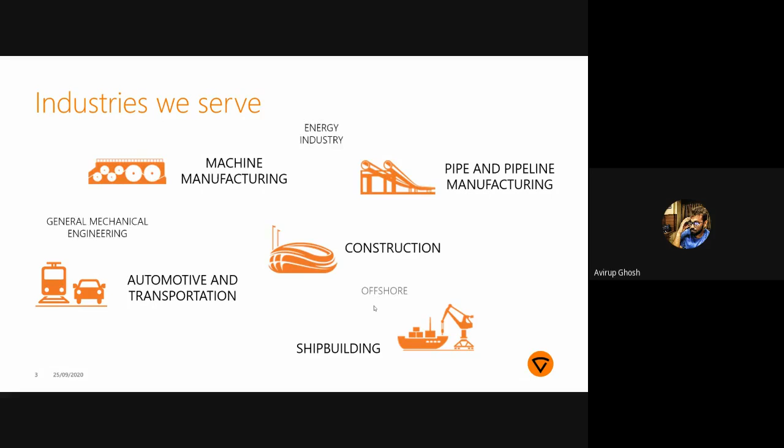Just a preview of where welding is found. You will find a huge lot of engineering segments where welding is being used. These are some of the five major industries, and apart from that, you have some sub-industries below this.

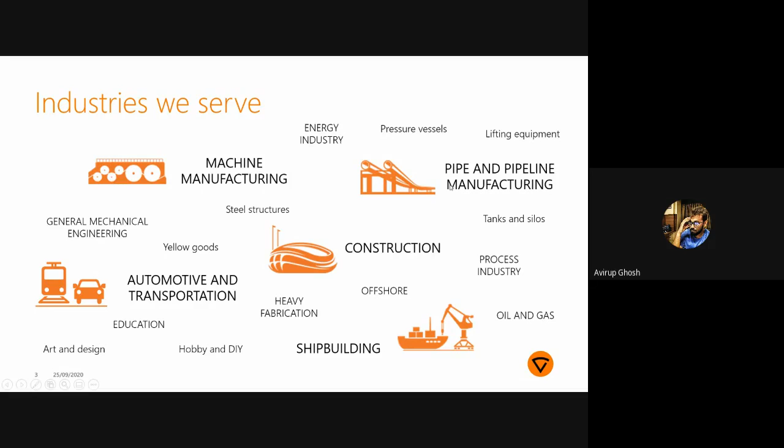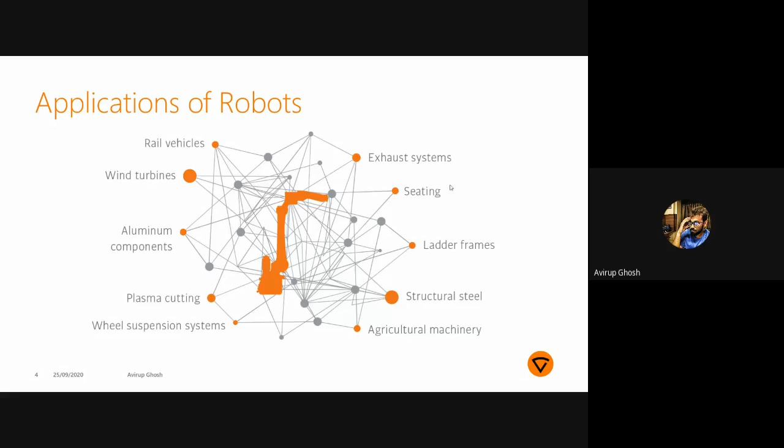But when we go to robotics, we'll see half of this is not that much covered. If I go to a Venn diagram of how robotics is covered in these fields, you will see around 70% of these industries are covered with robotics, because when we go for a robotic process automation or automated welding process, we need a lot of path planning to be done, which is not 100% achievable in all the welding industries.

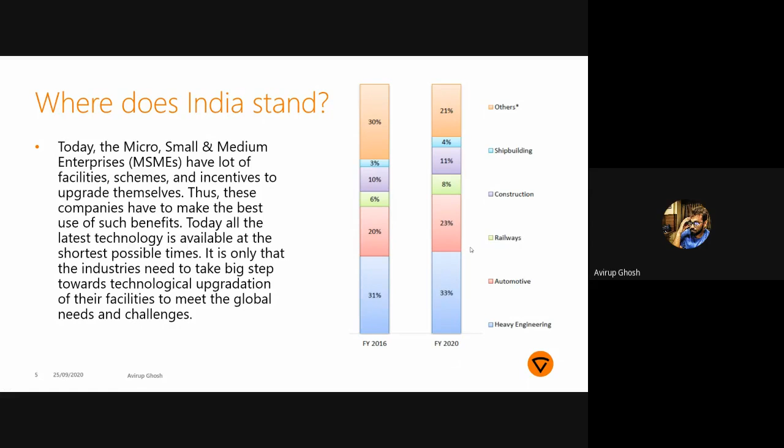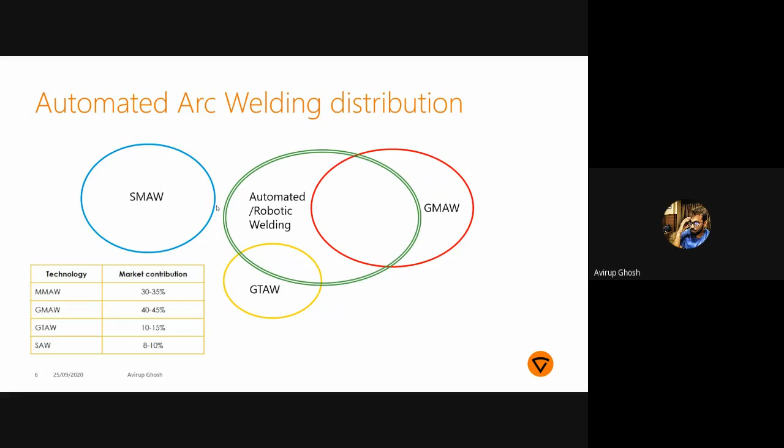But basically, we do not touch SMAW in automated or robotic welding processes. You might know the reasons already. I'll not run into the major reasons of why this Venn diagram is drawn in this way.

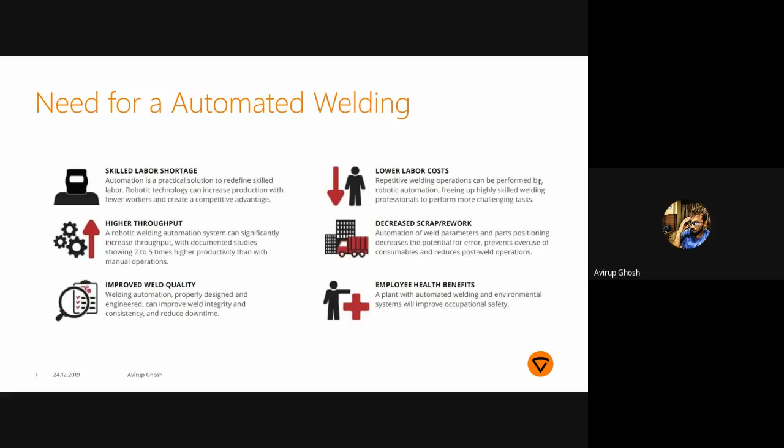So why do we go for an automated process? There are 6 major reasons, kind of the 6 thumb rules of why we go for an automated welding process rather than a manual process: skilled labor shortage, higher throughput, improved weld quality, lower labor cost, decreased scrap/rework, and employee health. These are the six thumb rules that we say are the major reasons why we go for an automated process.

And if we talk about the defects that happen in manual welding, these are some of the defects that cause restrictions in manual welding processes. I'll quickly run through the issues.

If I just name them, you will come to understand why they are happening. First of all is improper bead profiles. Second is spatters, uniformity, lack of penetration or deformations, undercuts, cracks at the start and end of welding, productivity and porosity. These are the major 10 issues we face in manual welding, and why a person runs into automated processes.

Most of these issues, if you see, are caused by the user itself. So when a welder is welding, he is basically the culprit of all these issues. So what happens when we replace a skilled welder with a robot? Most of these issues can be covered up when we go for an automated process.

I'll give you two examples of how automation is done, and then we'll move on to why we require intelligence in the power sources and the robots also. The first solution where we automate is what we call moving the arc. That means the torch used for welding is not fixed. The job is generally fixed, and we are moving the torch.

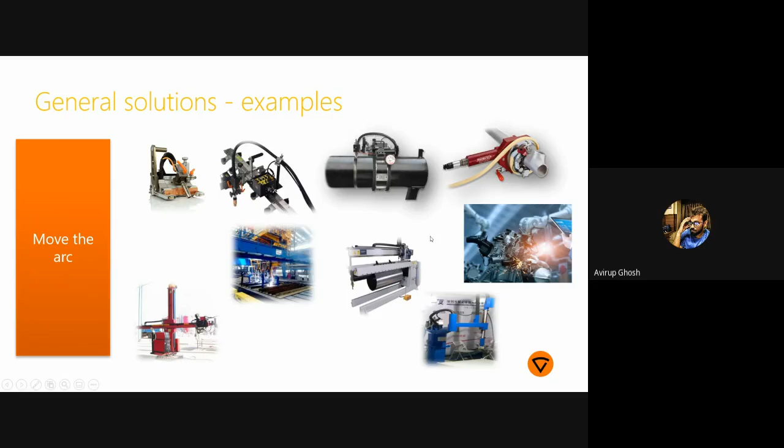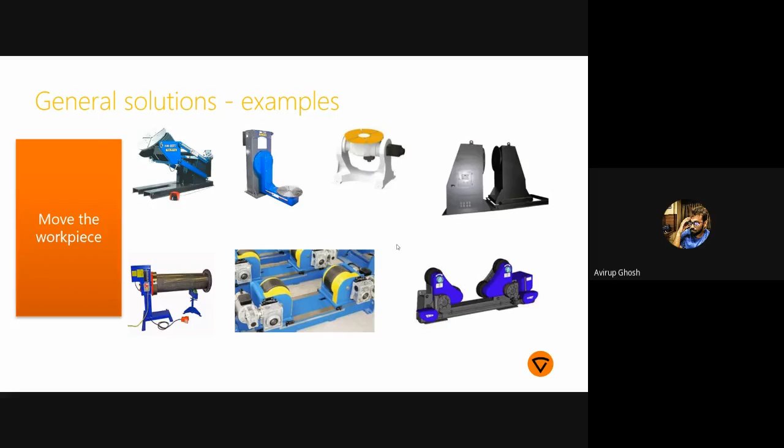The second point involves moving the job while keeping the arc and torch fixed. These are examples where we can have different positioners for moving the job itself. When we combine these two, it becomes more axes of movement, much more universal, with much more rotational freedom. So we can do much more complex jobs when we combine both moving the arc and moving the job.

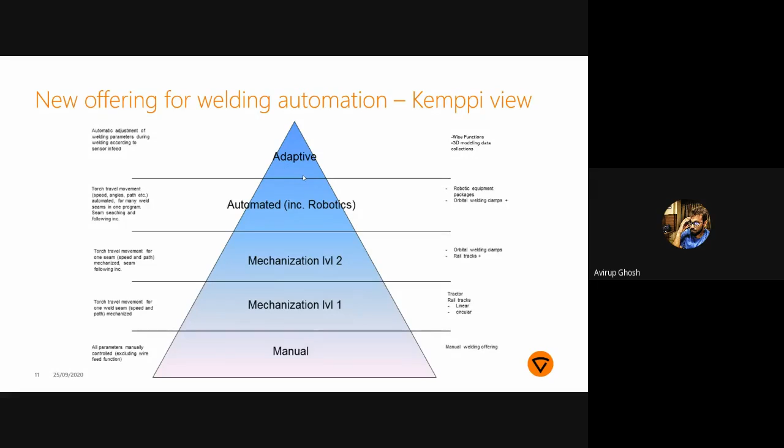When we have very critical jobs where we are not able to reach properly, or we have to complete the job at a particular cycle time, we need adaptive welding where continuous interference of a human is not advisable. A continuous interference of a human will basically increase the cycle time or make it difficult for the robot to weld.

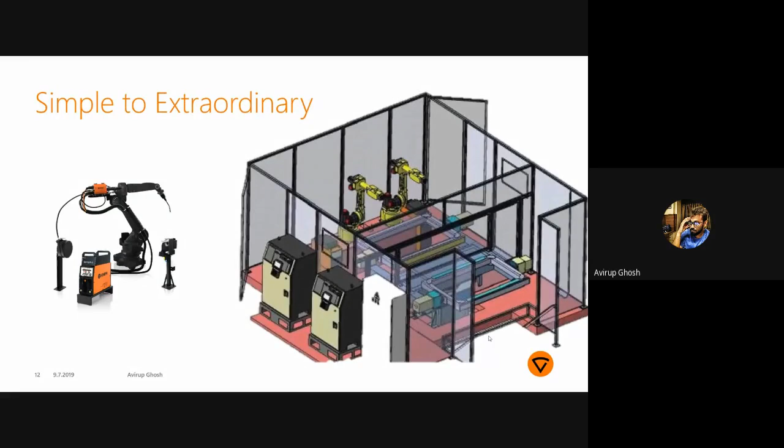In these situations where we have dual positioners, one positioner communicates with the other. If one has already completed, the job will be shifted to the other side. This kind of complex situation is created when there is complexity in the job. Everything depends upon the job itself, like the job description and the seam description. According to that, we plan the path of movement of the robot.

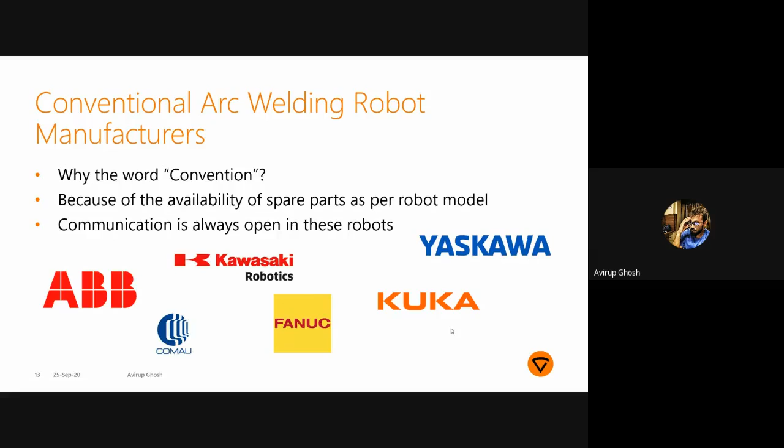So I'll just run through a few conventional robot names and unconventional robot names, then we'll move on to the software parts. These are the conventional robot names which have some standard software that we'll be describing and discussing. We also have unconventional robots which are not actually designed for welding, but they are coming up with different kinds of welding processes.

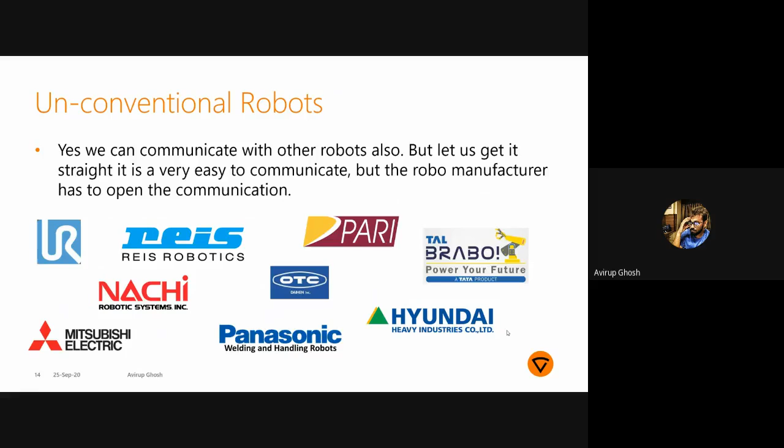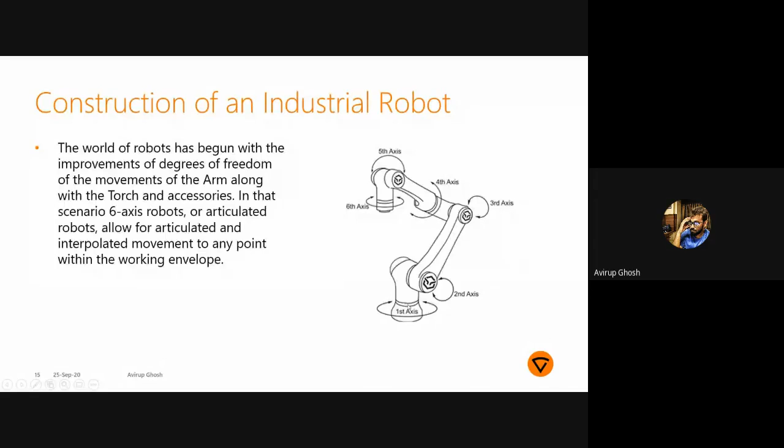This is very standard for each and every robot right now, but there are improvements coming up, with new axes being introduced. 7-axis, 8-axis robots are also coming up these days. And there are 2 designs of robots.

This is also very common, the wire feeder placement denotes the differences between robots. A wire feeder placed on the back of the robot is basically a hollow arm robot, where it has a higher degree of rotation at the 6-axis, where it can rotate a torch along the 6-axis 360 degrees. Solid arm robots are not able to do that because the torch will hit the 3rd axis if you rotate it 360 degrees. So there are 2 designs of robots.

This is also very common. Solid arm robots are used for simpler jobs, not circular jobs. Hollow arm robots are used for mostly different kinds of circular jobs where the 6-axis needs to rotate 360 degrees.

Okay, so going down, we will be having the software to support us. Where does each and everything come from is basically electronics. So the electronic components of these robots are becoming much more complex day by day. As we know, Gordon Moore's law tells us that more transistors per year per inch is increasing, and that is making the electronic circuits much more complex.

The main reason being it is becoming much more user friendly. So to make it much more simpler for the user who is using it, the circuitry of the robots is becoming much more complex, and in that way the power sources are also becoming much more complex, which are getting integrated into the robots, having a much larger input output table with the robots.

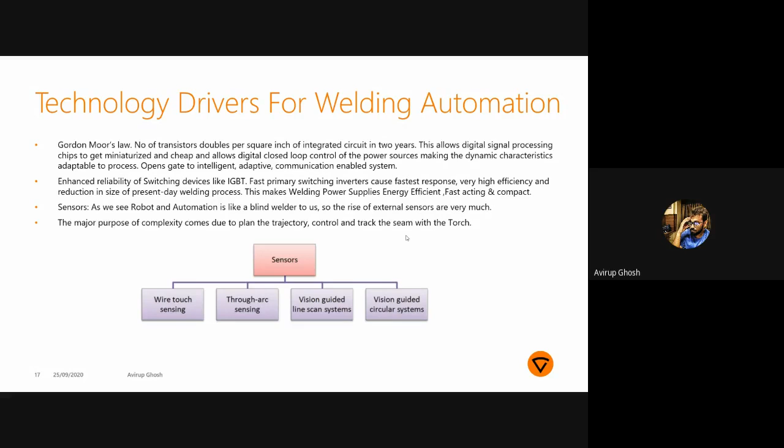Supporting these four sensors, we also need intelligence in the power source to understand if there is a variation coming up or not. So we'll start with the power source software, where the power source should be intelligent enough to make corrections, then we'll quickly move on to the robotic software.

What is happening between the older day communications and the modern day communications is basically this: all these kinds of sensors which were previously external are becoming internal sensors of the power source. So the power sources are becoming much more complex internally.

For example, this is a GMAW power source setup on an automation system. Previously we used to have external sensors for detecting current or voltage variation, which had to go to a controller, and the controller gave output to a CPU or computer, which then had to give feedback back to the stepper motor of the automation to move away or towards the job, or track the seam.

Nowadays it is becoming much easier. Everything goes through a digital communication module and is transmitted from the power source directly to the robot. The robot understands what the power source has detected, whether there's a variation in the path, voltage, or current, and the power source itself detects it and gives feedback to the robot directly.

So it's becoming much easier for the user to set up a robotic system. Previously it was much more complex; we used to have a lot of external sensors. I'll give you the names of the sensors at the end of this session, and explain how these sensors that were externally used are now being used internally within the power source.

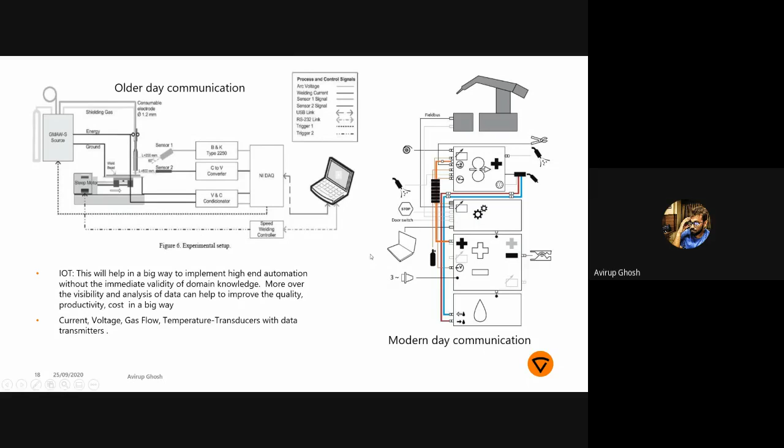This advantage of the power sources has increased their adaptability, making them much more IoT based. So everything can be controlled from one kind of controller, either a PC or the robot pendant itself.

The main reason behind this development was the communication techniques. Previously, in the 1980s or 1990s, the communication between the robots and the power sources was always analog, hardwired with 0 to 10 volt or 0 to 24 volt I/O. For example, 0 volt meant no, and 24 volt meant yes. So it was a hardwired communication.

Later on, everything shifted to digital communications, which also had two variations. Previously we had external cards, where the control pin was different according to the communication protocol module. Nowadays we have M30 and M40 modules, which are the modern module communication techniques. As complexity and electronic circuitry increased, it became much simpler to communicate between the robot and the power source.

These M30 and M40 modules are much faster. They can carry much more data between the cables.

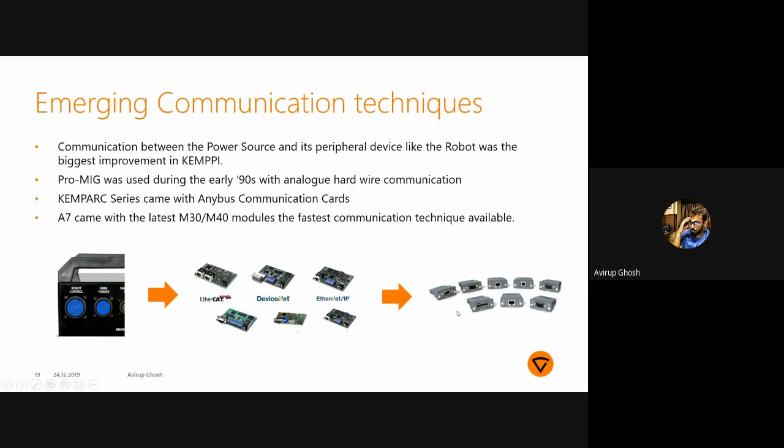What happened to process improvements? As we moved from the 1980s, the process has also improved. A lot of welding techniques moved from SMAW to GMAW processes, which improved the market scenario for automated welding, because as we all know, SMAW is not an automated process—we cannot automate it. As the GMAW or MIG-MAG market grew, automation grew accordingly, and along with that, the four-wheeler, two-wheeler industry, heavy engineering industry, yellow goods industries, and shipbuilding moved on to automated welding processes.

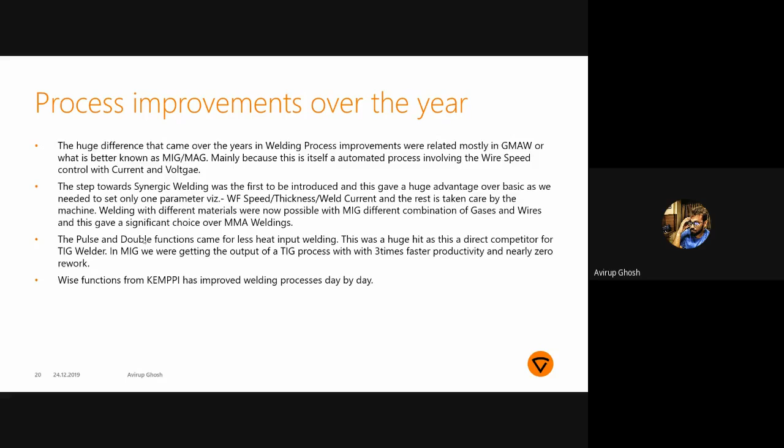Even the TIG welding processes have been converted to different kinds of MIG processes, like pulse and double pulse, where lower heat input can be given compared to TIG welding. Even some applications where root welding was only done with TIG can now be replaced with MIG welding. These process improvements have helped us move towards automated or robotic welding.

Now we come to the software part, where the software of the power source is intelligent enough to understand if there's a variation coming up. We'll go one by one. I'll brief you on what we'll be discussing. There are 5 software functions I will discuss, named as WISE functions.

WISE is a brand name from Kemppi. These are adaptive software for path planning, or path movement variation correction software. We'll start with WISE Fusion. This is basically a fusion technique where we control and correct the arc length variation that comes from the power source.

When a robot is welding with a pre-planned path from point A to point B, you are teaching the robot without the arc, so you won't know if there's a variation coming up in the arc length. So when it is welding, the power source should be intelligent enough to understand if the variation is coming up, and produce more or lesser power accordingly. If the variation is more, it will reduce the power; if the variation is lesser, it will increase the power - it's vice versa.

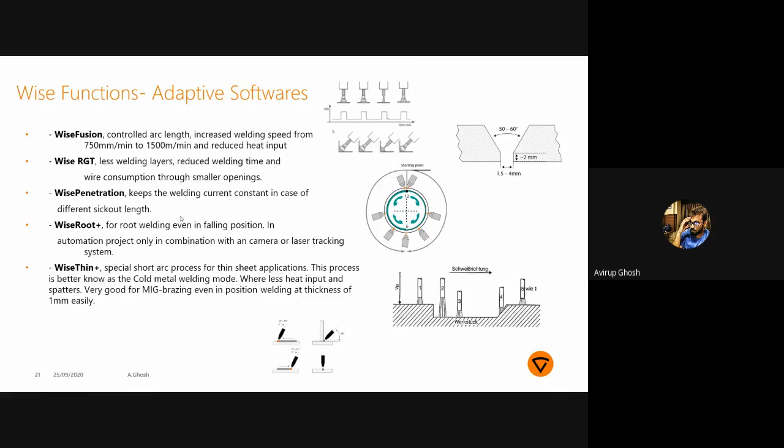I'll run through these processes one by one so you understand how they work.

So we'll start with WISE Fusion. This is basically software where the arc length correction is done by the power source itself. What happens in robotic welding is when we plan a particular path with a fixture where the torch is not able to reach certain joints, the arc length is continuously changing. In robotic welding, the arc length is always changing.

When a manual welder does this process, he has his technique of keeping the torch angle constant. But what happens when a robot is being taught? You basically take a 15 stick-out and teach from one point to another without taking care of the angle change. So when you do this, there's an angle change and the arc length increases when you have a curved path. When it's linear, there's no profile change.

When it is generally curved, you will have an arc length change, and that affects the bead appearance. So when we have WISE Fusion switched on, this software corrects your arc length variation - if there's a longer arc length, it will increase the current accordingly. I'll play the video to show how it welds at a much faster speed. When we keep this software switched on, it affects the cycle time of the total process - for very high speed welding in automotive segments, we can achieve around 1.2 to 1.3 meters per minute during welding.

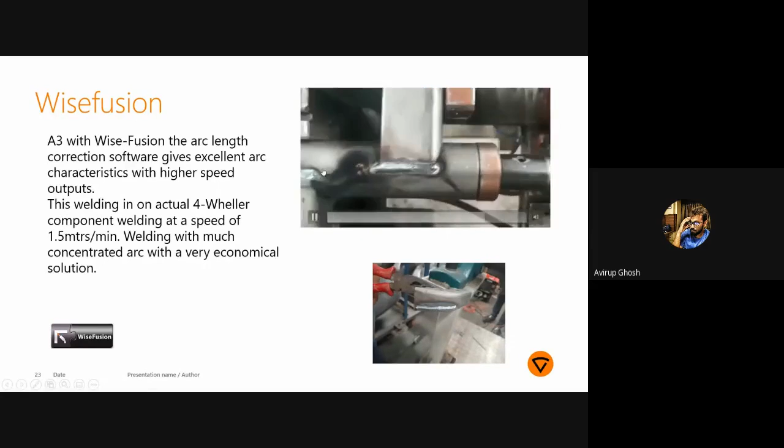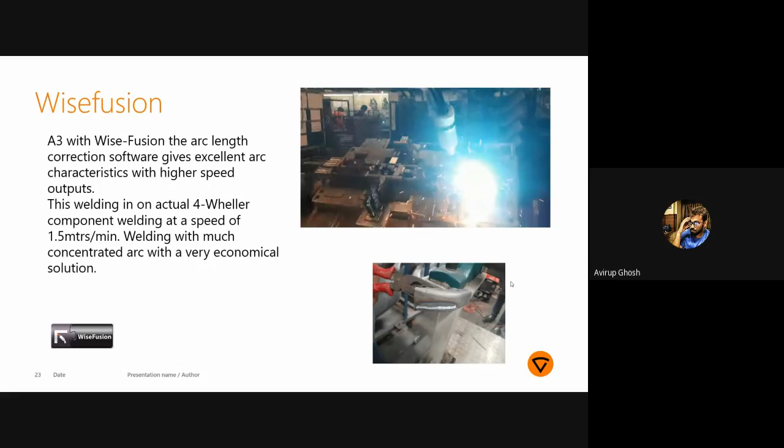And again, this is a non-linear path, like a curved path. So basically different kinds of paths might come up during the actual fixture welding processes in the automotive segment, or even 4-wheeler, 2-wheeler segments, or even process automation segments. In that particular segment, the power source should be capable enough to understand there's a variation coming up, and according to that, correct the arc length.

Going to a little bit of a different advantage of what we get from Wise Fusion. Basically, as we all know, pulse welding is used for low heat input processes, but there is a disadvantage of pulse welding. What happens when we are using pulse? The speed of the robot goes down.

The main reason is that pulse welding is where the current is continuously changing. Say per second, it has a dual current mode - it changes from a high current to a low current. So the path traveled in a synergic welding or normal MIG welding process is much larger than in a pulse welding process. If you are welding say 1 meter continuously in a linear path, that 1 meter may be covered within say 1 minute, and your pulse welding robot will cover around 700 or 800 of that particular path. So pulse welding covers a little bit of lesser path, but the heat input to the base material reduces because of the changing current.

But this particular process can be sped up using this add-on software itself. When we are using pulse, we will switch on this software to give you a corrected arc length. So what happens when pulse welding is going on is the arc length is continuously changing because of this change of current. But this change of current can be corrected enough.

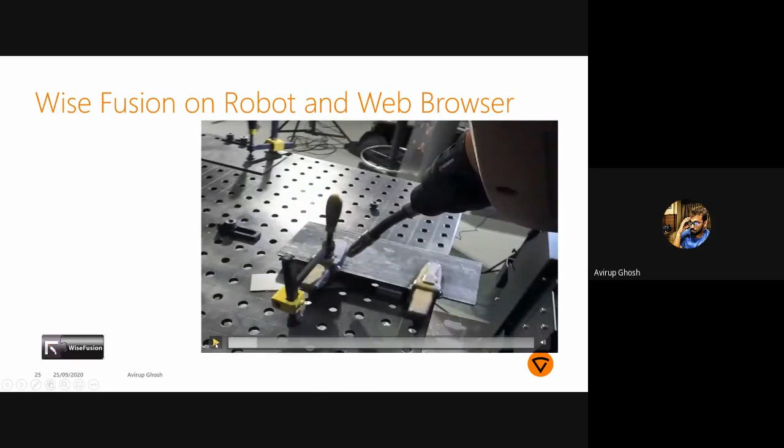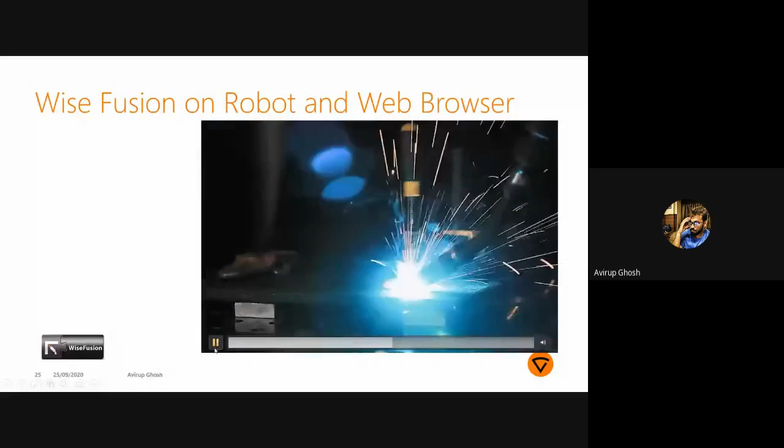As you can see in this particular path also, there is a continuous variation of the arc length. The arc length is also not constant, because we are not able to predict exactly where the wire is going. So that particular arc length correction is again continuously done by the power source while welding, and it is being corrected continuously.

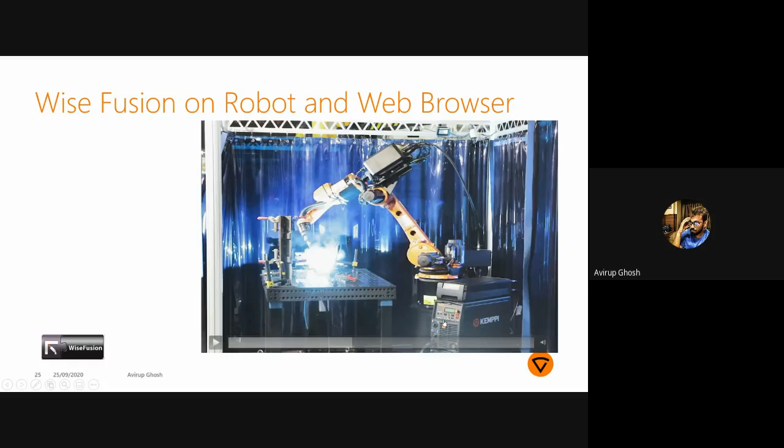Okay, going to the next intelligent software from the power source side, that is known as Wise Penetration.

Penetration is another one of the most vital sectors of discussion in welding.

What happens when the stick out length changes? The stick out length is basically the distance between the contact tip and the job. It can shift during manual welding, as a manual welder will not be able to keep his hand constant while welding along a linear long path.

What happens when he has moved from a 15 mm stick out to a 30 to 40 mm stick out? The practical effect of this situation is basically a decrease in penetration, or lack of fusion.

What will happen to the penetration level? When you move away from the job, the penetration level comes down, and when you move much further away, the penetration level is nearly zero, like only 1 mm of penetration happens.

This can also be corrected by the power source. What happens in this situation is that the current output of the power source decreases. As you move away from the job, resistance increases, so the current decreases continuously.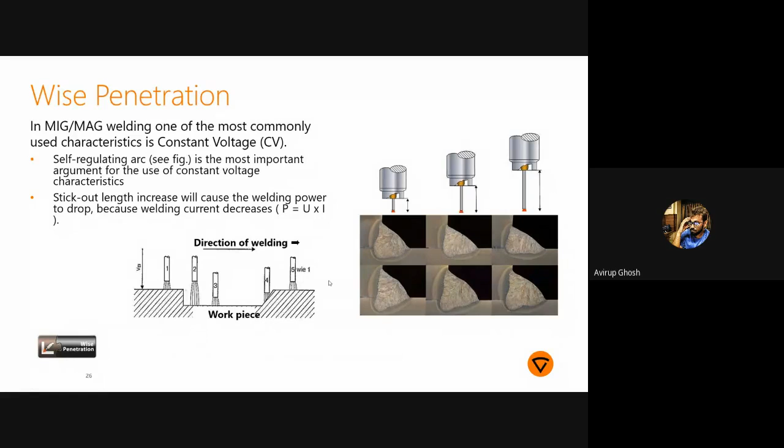So this is another quick adaptive process where the power source quickly understands if there is a variation coming up in the stick out length, and adjusts accordingly.

I'll just show you how it is happening. This is a continuous adaptive process. We don't change anything in the power source ourselves; we don't go on changing the current, but it detects and automatically changes the current.

So we'll go from 15 to 25 here, but with no change in parameter. If you see, we have started with 15, gone to 20, and it will go to around 25.

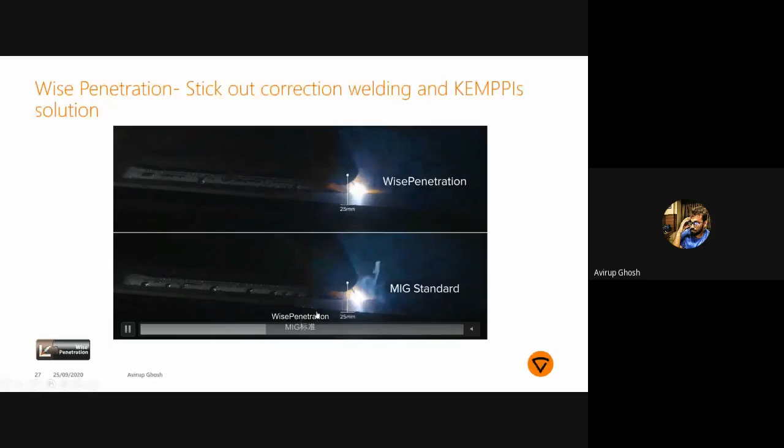This is a standard MIG process. This is with Wise Penetration MIG. Bead-wise, you will not feel much difference, but when you cut and check inside, we will see the difference shown here.

If I pause here, you will come to understand. See what happens when there is a 15 mm stick out, a 20 mm stick out, and a 25 mm stick out. You can clearly see the penetration level has gone down - the penetration is lesser here.

But what happens when we have Wise Penetration switched on? You can see the penetration level is nearly constant.

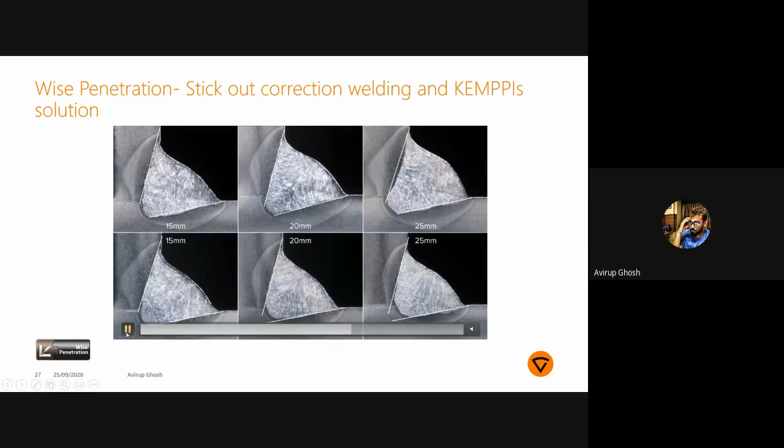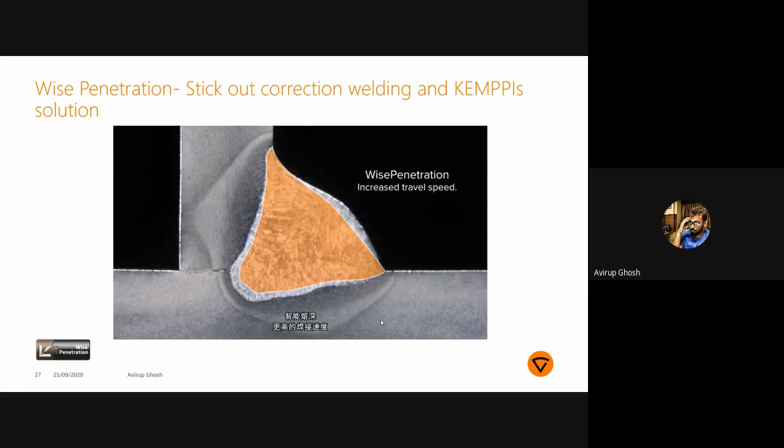So this is basically a kind of self-regulating arc process where we save on repetitive teaching of the robot. We don't continuously teach the robot to move away or move toward the job if there is a variation in the z-axis from the job.

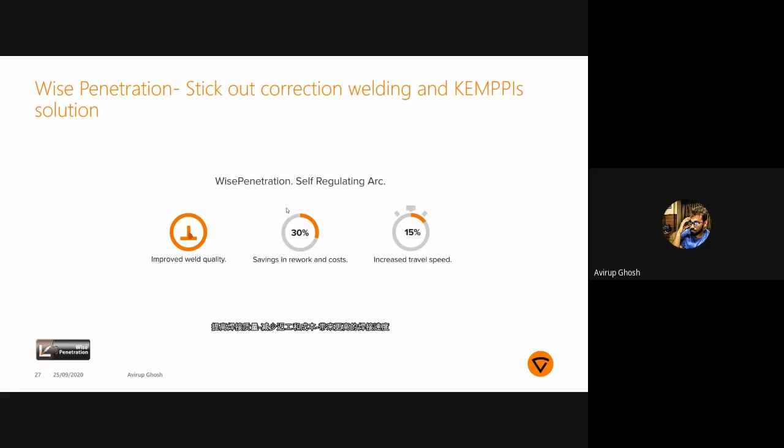Moving to the third adaptive software, called Wise Thin software. In this process, it's a kind of cold welding process where the wire being transferred to the material is much colder than any other process currently available.

This is basically a short circuit process, and it gives a lower heat input even with normal MIG-MAG welding using mixed gas.

Gas plays a very vital part - you all know that argon CO2 gives a much lower heat input to the base material. But practically speaking, when we use Wise Thin Plus, even with CO2, we have achieved lower heat input to the base material.

All these trials are done with 0.6, 0.7 mm plates and 0.8 mm wires. I'll just quickly run through a video.

You will come to understand how we have done it on corner joints like this. This software is mostly used in the automotive segment, where regular reduction of plate thickness is happening just to increase the fuel efficiency of vehicles.

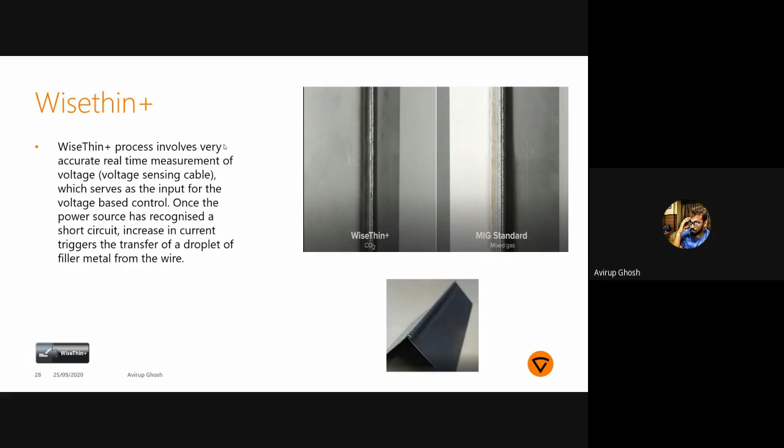So this is basically kind of - I'll come to how it is happening. I'll quickly run through the video once. This is corner joint welding on a robot.

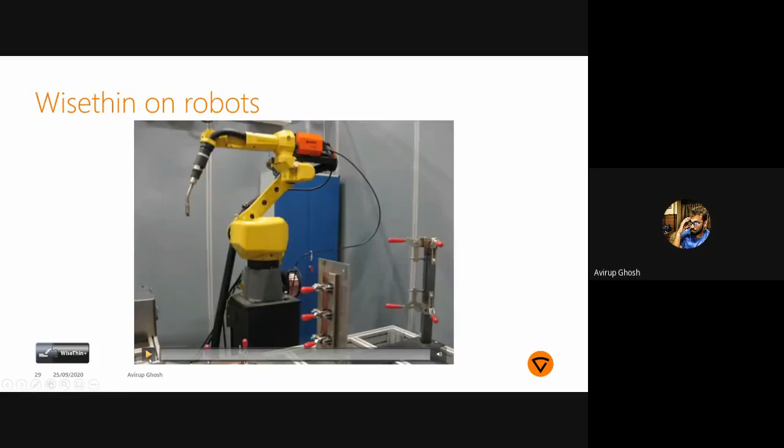Please note, this is not a pulse welding process. This is a short arc welding process where it is a continuous current flowing through for the welding.

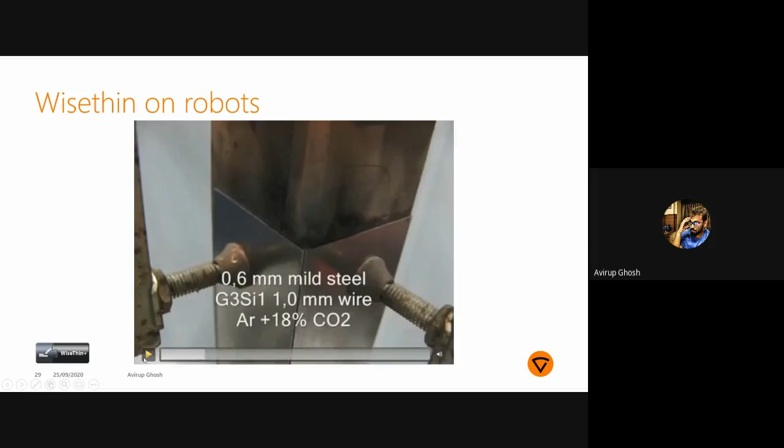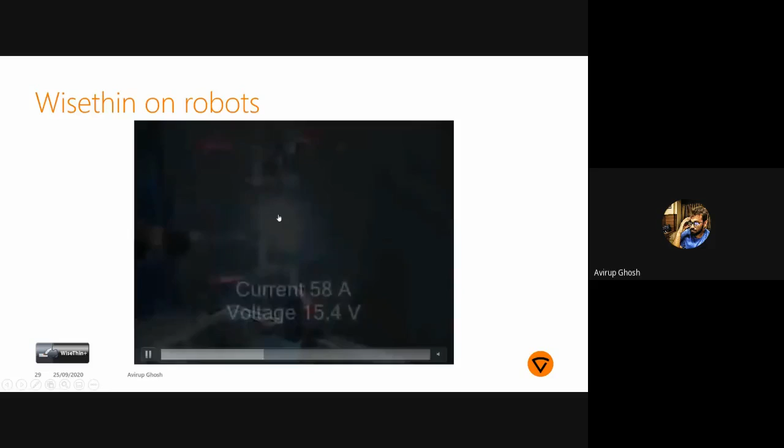The welding speed is around 1.5 meters per minute, and we are going downhand. The total heat input is around 0.03 kilojoule per mm. Practically speaking, you can basically touch the material just after welding also.

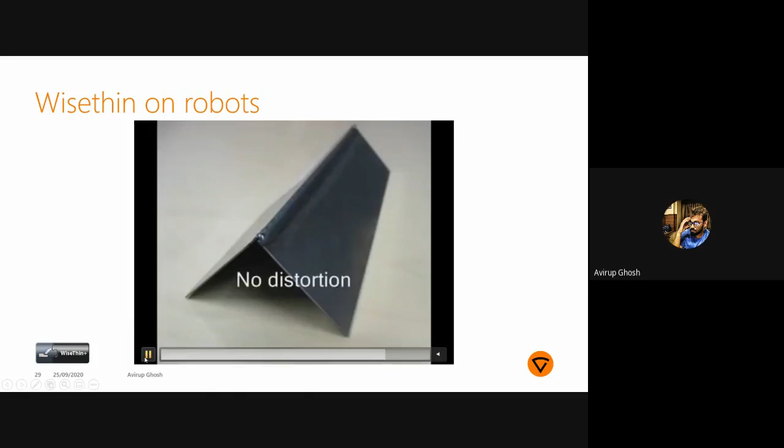How does this happen? I'll go to the next slide and you'll come to understand. This is basically a cold metal welding process where the material that is being transferred to the base plate is in a cold state. It is not heated, even not like double pulse, even not like pulse. So in this particular process, there is a two arc phase process where one arc is a short arc phase and another arc is an open arc phase. During the short circuit phase, the material is being transferred.

If you can see this particular video, this is kind of an X-ray video from the joint, so you will see how it is happening. It looks like kind of a pulse welding, but this is definitely not pulse welding. This is basically kind of a modified short arc process welding.

This is the lap joint. This particular part to this particular part, we are doing the lap joint of this process.

Okay, how does this work? This is basically a process where we take actual arc voltage data from the job itself. The job is being connected via a secondary cable, not the torch, not the arc cable, but a secondary cable from where we take the actual arc voltage value, and according to that, when the variation is coming in the arc, the voltage can be corrected here.

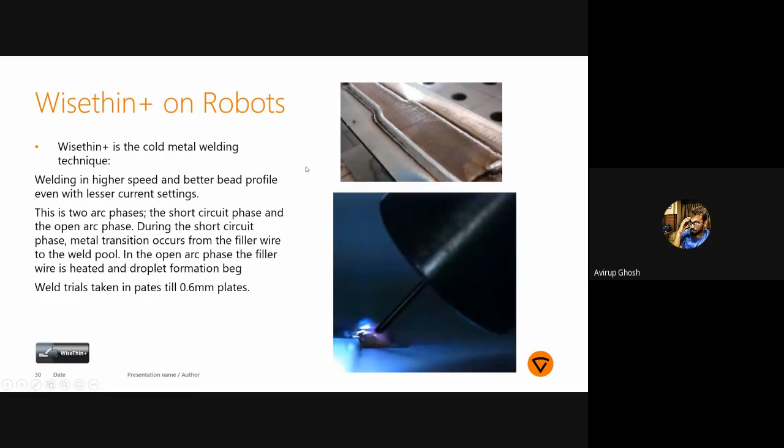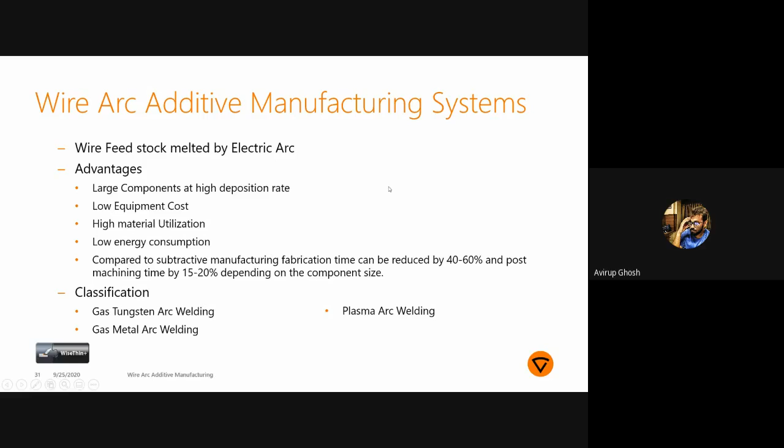An unorthodox example of this particular process is that it is being used for a very interesting process right now happening in the robotic field, that is wire arc additive manufacturing, where we are building different kinds of blocks using wire, using metal deposition. Blocks like this can be built up using this particular process. This is one of the fastest processes for building these blocks.

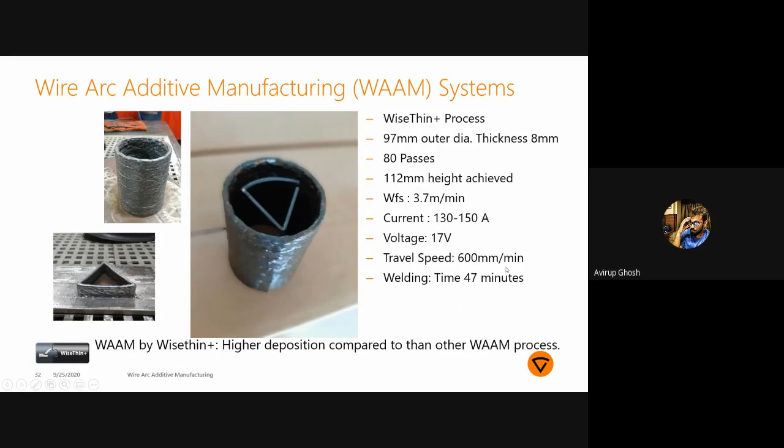We have actually given you an example. We are building blocks of around 80 passes with a height of around 112 mm in around 47 minutes. So this is one of the fastest processes for doing wire arc additive manufacturing.

The last intelligent process from the power source is basically the wise root process. Root welding is one of the most avoided weldings in the application of robots. Root welding is generally not done in robots, but I'll show you an application video where we will be doing root welding using this particular process itself. The major advantage of having this process is it can weld different kinds of angles, different kinds of bevel angles.

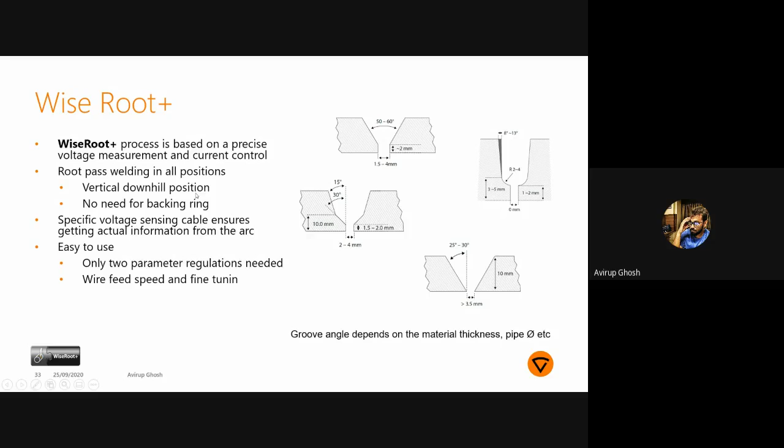We use the same technique. We basically take in the voltage variation that is coming up, the actual arc voltage variation, and according to that it changes.

We'll quickly run through the basic video of how it is happening, and then we'll go to the application video. The major advantage of this process is we can replace the root welding TIG welding process using MIG. So as I was telling you, the TIG welding process can be replaced with this kind of MIG welding process.

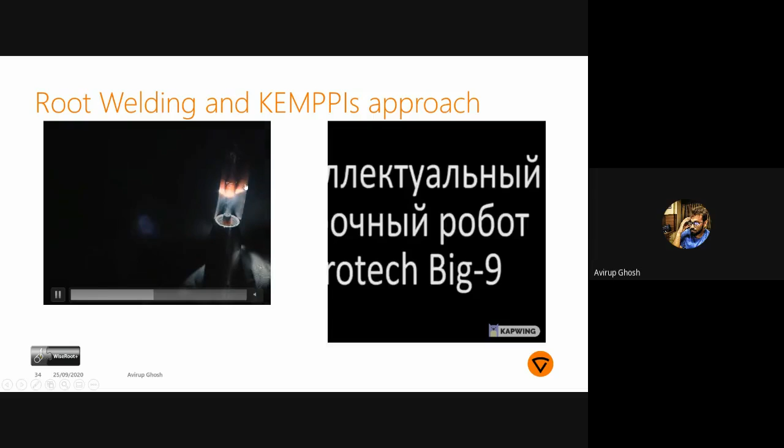As you can see, the torch angle is continuously changing from 1G to 3G to 6G, and even overhead positions also. We have done this process, and even in overhead positions, without any change of parameters, we can achieve uniform beads, uniform root weldings.

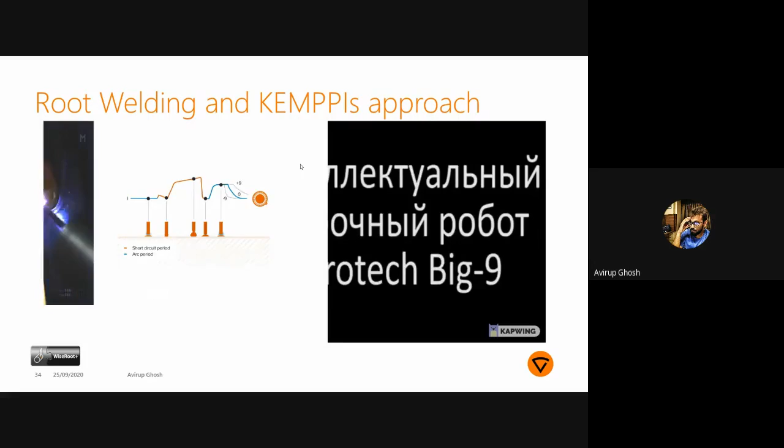Basically, this is again a mixed process where it shifts from the short arc to the globular transfer, and again comes back to short arc and again the globular transfer. This is totally done from the power source itself without changing any parameters. This is the WiseRoot, and we do not need a backing for this particular method. I'll show you a video of an application.

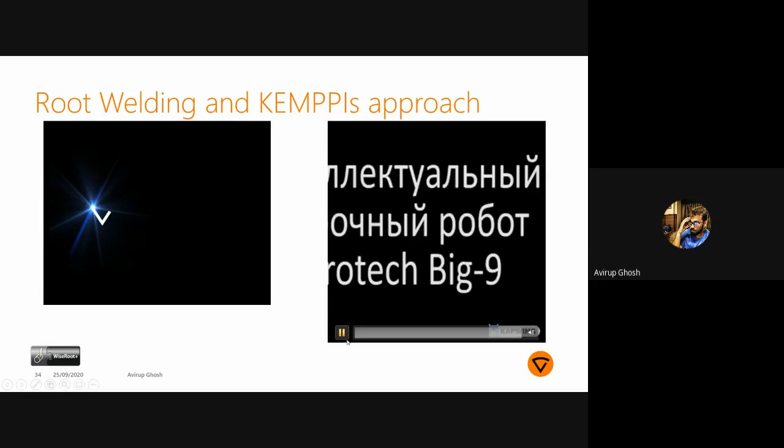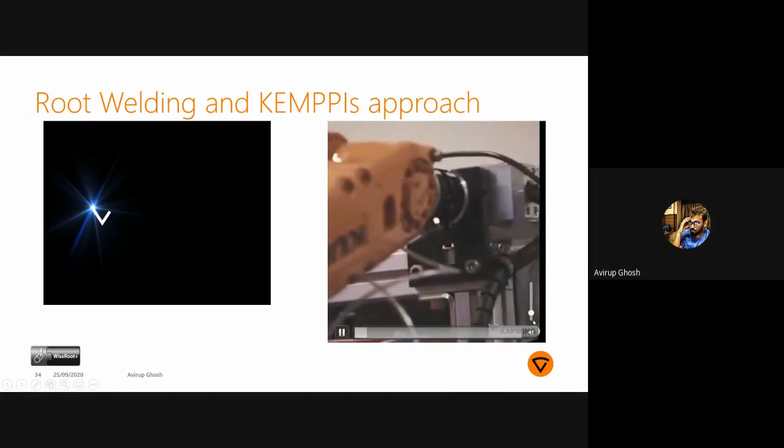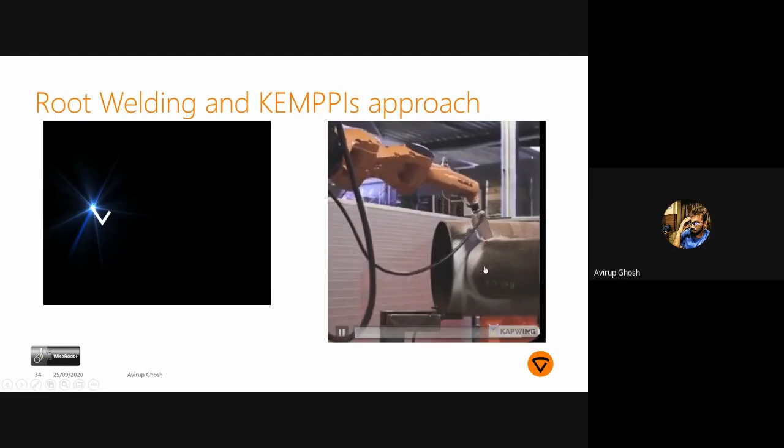This is a tool changer where it will track the seam first. This is a pipe to pipe joint. If you can see, it will show you the root of the pipe. It will scan the root first. This is just an example of how the robot will be intelligent enough to understand where the root is.

Once it has tracked, the robot understands the movement path. It will take the torch and it will go on welding. For the welding part, if you see, it will start at an overhead position and it will go from the overhead position to the 1G position itself.

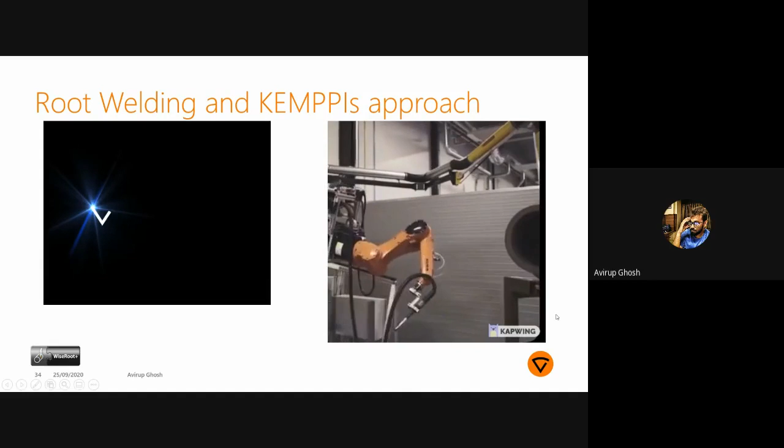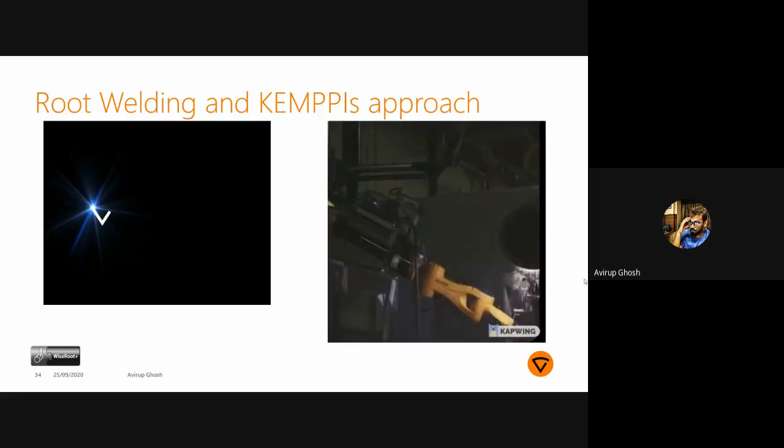So it has started weaving also. I'll fast forward it so you'll understand the pipe is not being moved.

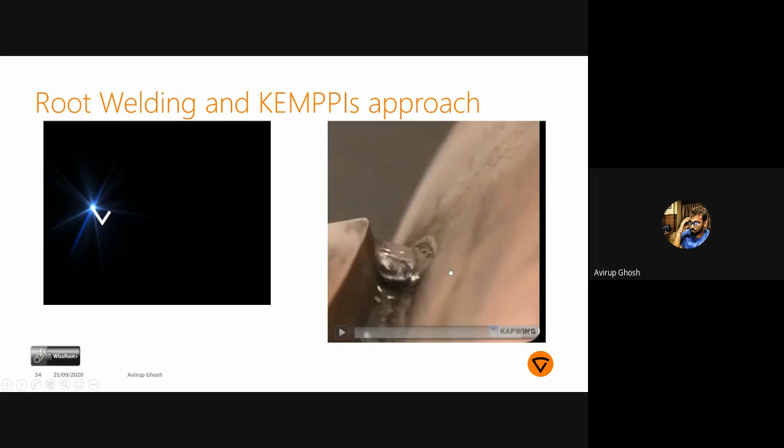So these are kind of the applications where multi-layers will be done. In this process, the robot is basically kind of a blind welder for the power source. It carries the torch, but the power source itself understands if variation is coming up in the voltage, and changes accordingly during welding.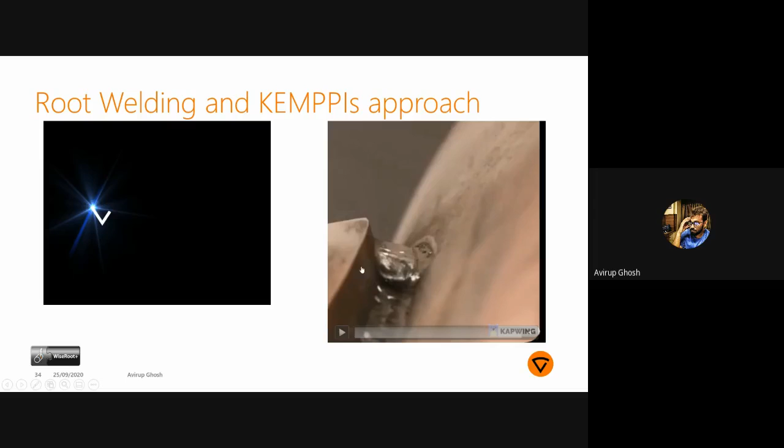Now coming to the intelligence of the part finding. This is another point where we have to be a little bit particular, because shifting of a job can easily happen when we have already taught the job. What happens when we have already taught a particular path for the robot? It replicates the path each and every point, so you don't have to teach the particular path again. But what happens if the job has already shifted? So we need to sense the path before we start the welding.

So there are two techniques of doing that. One is basically an offline technique where it touches the part and senses if there is a part or not before it starts the welding. This is called touch sensing.

Touch sensing can be done via a wire or a nozzle also. The technique is done by the robot. The robot moves towards the part and touches the job, but it is supported by the power source. The power source itself generates a voltage, which is fed back to the robot, and when it touches the job, it goes to zero via the earth cable. So this is kind of a soft intelligence software where the robot understands, okay, there is a part and I can start from this area.

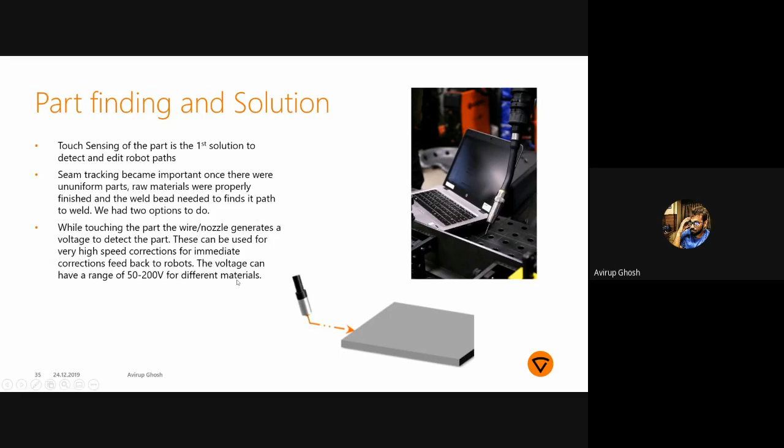Or even if it has shifted from the actual taught point, if it was taught at A and it has moved to A+5, it will move from A to A+5 to understand if the part has moved from that point to any other point or not. This can be done with this kind of sensor, called a touch sensor. This is generally the inbuilt feature of the robot and the power source.

The second process is basically an online process, known as through-the-arc seam tracking. In this scenario, while welding itself, the path is being tracked during welding. So this needs a kind of joint preparation. It has to be done on a fillet joint like this, or a butt joint where it has a face, where it can detect the two corners of the face.

In this method, the arc length is continuously changing, and that arc length change is being tracked by the power source. If you can see, when we are weaving, the arc length variation comes up, and this gives feedback back to the power source, as I was talking about previously. This arc length variation is detected by the power source and fed as an offset to the robot itself. This technique is known as through-the-arc seam tracking.

The reason for this name is because we track the seam through the arc itself when the arc is being generated. So when the arc is generated, if we are weaving in this particular path and moving towards the path in any direction, the arc length decreases, and if we are moving away from the path, the arc length increases.

So a decrease in the arc length gives feedback to the power source that the current has increased, and an increase of arc length gives feedback that the current has decreased, and this increase or decrease of current gives feedback back to the robot. When it has increased, it should move away from the job to keep the center line, and when it has decreased, it should move towards the job to keep the center line. So with a weaving motion, we can track the seam while welding itself.

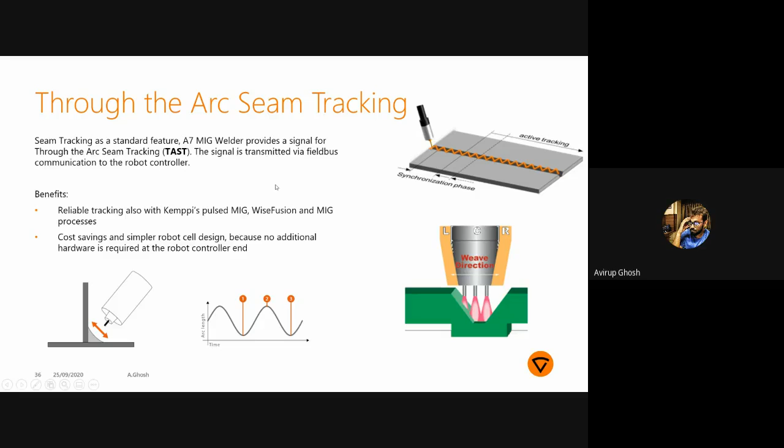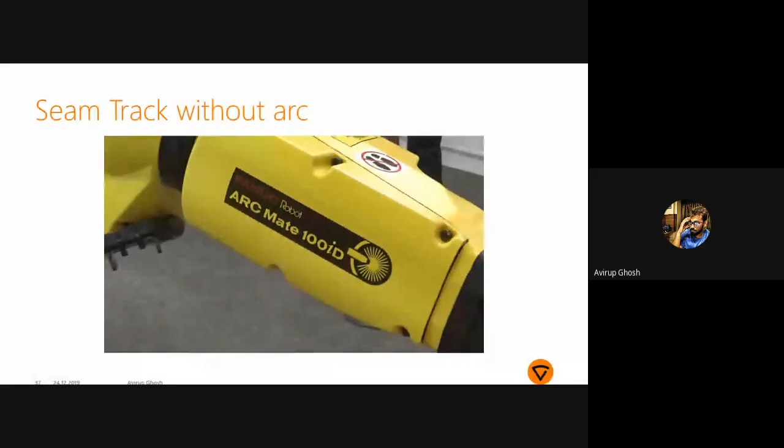I'll just show you a path description of how this is happening while scanning, while weaving the root of a pipe.

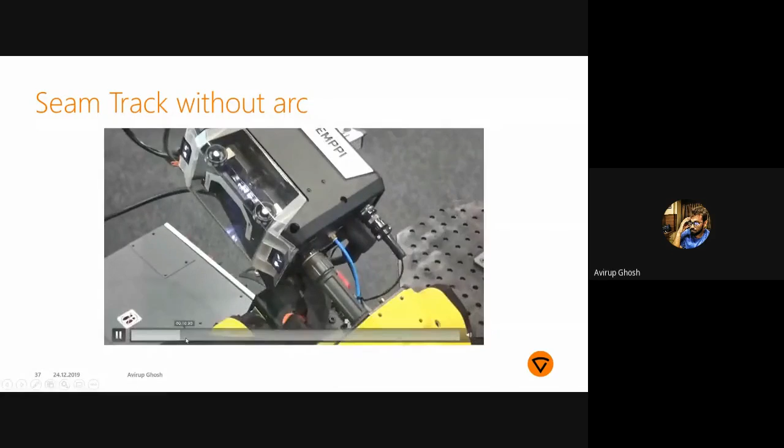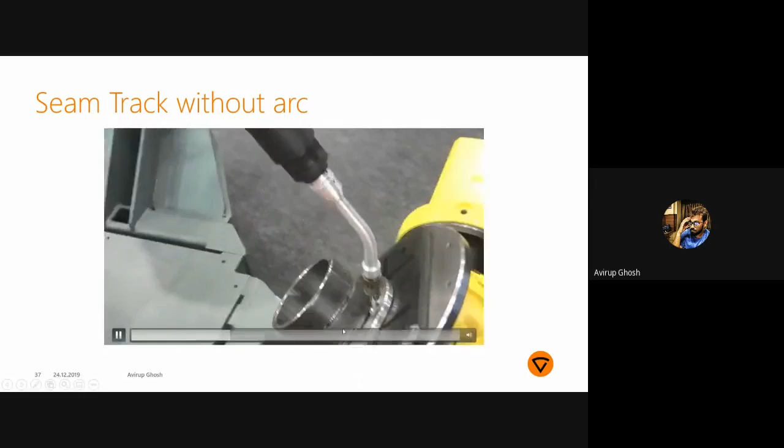So now, if you can see, while moving in this direction, the robot is continuously weaving, and this weave nature will help it track the seam whether it is moving away or moving towards the job. So weaving is one of the most important features while we are doing arc seam tracking.

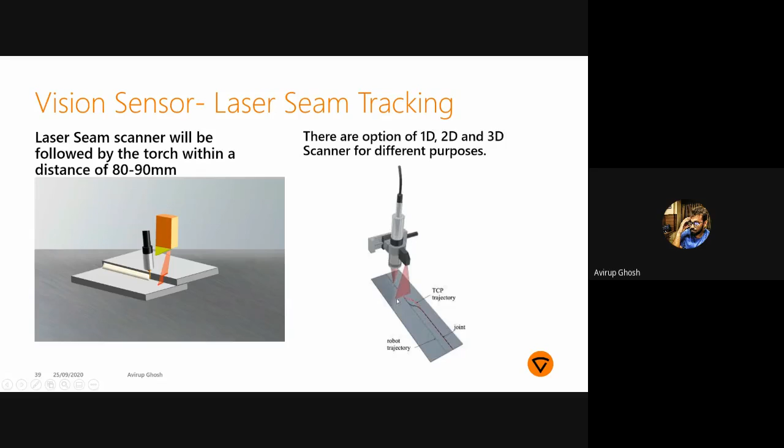And these are the two techniques where the power source and the robot are involved. What happens if there are external sensors, external vision sensors for the robot? In these cases, the power source is not involved in the sensing, but the sensor itself gives feedback back to the robot if there is a shift in position, like lap joints or trajectory path movements. This can be tracked by the laser and fed to the robot itself.

As we all know, IoT, the Internet of Things, is becoming the next feature of all industrial equipment. Internet of Things means it should be controlled via a single controller - it can be a laptop, a pendant, or your HMI screen itself. So what happens when it is controlled from a laptop?

We have different robot studio softwares or robot teaching softwares which are becoming offline softwares for teaching a robot a path. So when you have different offline programs, you can have a 3D model of the part you are going to weld, and that can be fed to the robot software. The robot can move according to that path.

And what happens if you have the control over the power source also from the laptop? Then it becomes much easier for you to plan the whole setup while sitting at the laptop itself. This is another important software being given - actually not a software, but an extension from the power source which can be connected to your laptop, and all the parameters can be controlled from your laptop itself. So it becomes easier when you go to the welding cell - you've already prepared the setup, so you don't have to go and again set up the power source parameters and start the welding from the robot pendant. So basically everything becomes one screen control.

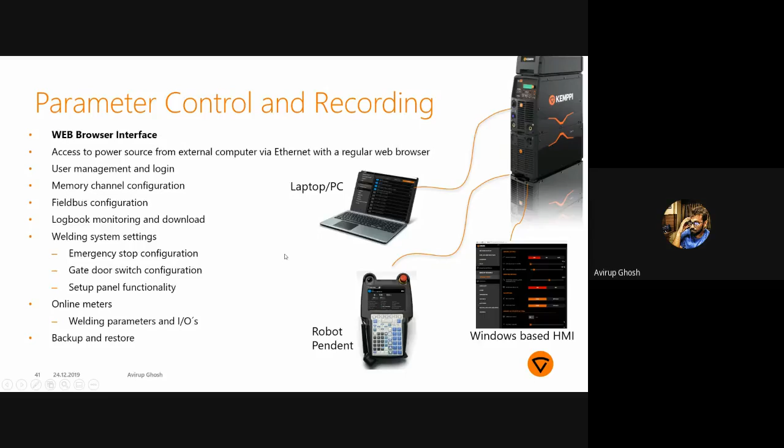So I think this was what I was mentioning - what are the sensors we used to have externally, and what are the things we have internally. I'll just run through it one by one so you understand it much better.

Previously, we used to have welding current measurement sensors, which are Hall sensors or current shunts. These were external sensors previously, and these shunts are becoming internal sensors of the power sources, where the current is continuously read back by the power source. Arc length control is done via voltage sensors - these are also internal sensors of the power source, where the voltage difference due to arc length variation is again detected by the power source itself.

Weld edge sensors - these are tactile sensors or proximity sensors, kind of touch sensors which I told you about. This requires the intelligence of the power source and the robot to understand if there is an edge of the welding, or that is the starting point of the welding.

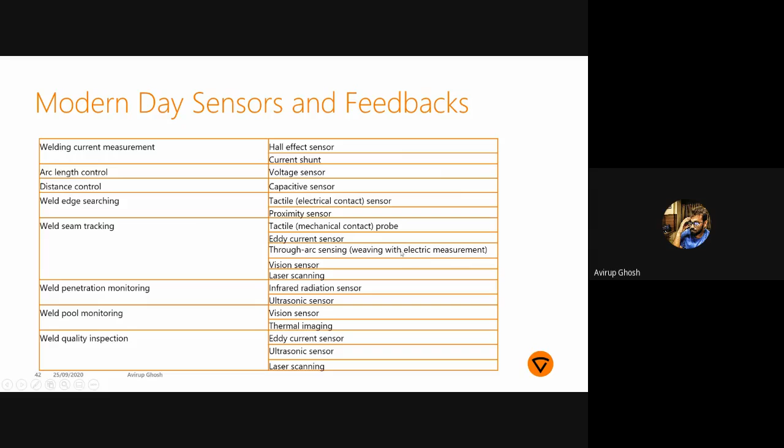So as you can see, most of these sensors are becoming internal parts of the machine. The machines are even intelligent enough to support the robot while welding.

Now let's look at the latest trends - you may know most of these, but I'll run through them. As I mentioned, online control of all the parameters is becoming the next big thing. Each and everything should be controlled via a single computer or a single setup, making it much easier to track everything before going to the welding cell.

Another technology coming up is wire arc additive manufacturing, which again requires a lot of intelligence between the power source and the robot to communicate while welding itself. Offline programming is also the next big thing - we will control the robot movement and parameters before going to the robotic cell itself.

7-axis robots are another development where more axes can be brought out into the robotic arms, along with complicated communications as I discussed previously. Artificial intelligence of robots is already in line, where two or three robots can communicate with each other while a job is being welded.

This makes it easier for a user to understand if the job is completed. The robots will be discussing and talking to each other - if one part of the job is welded by one robot and another part by a different robot, they can determine which part is finished and which is not. If one part has to be welded by a third robot, this adds more complexity when dealing with complex jobs.

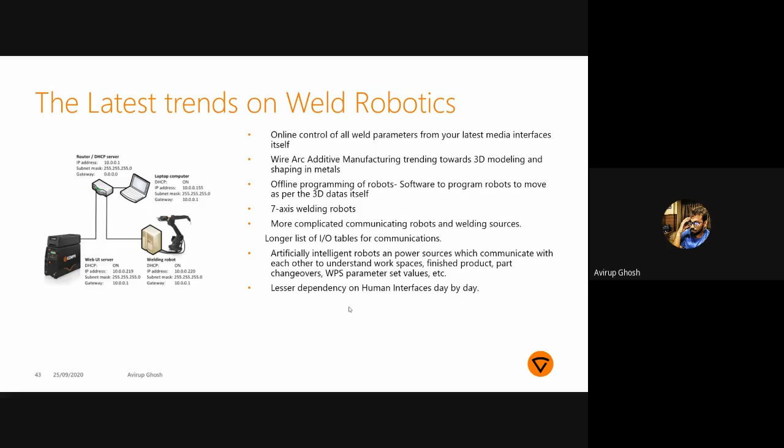The main reason behind all these developments is the last point - human interfaces are becoming less required in robotic cells, and that is the only reason behind this whole discussion. It's about making power sources and robotic setups intelligent enough to work on their own, not depending on day-to-day teaching or teaching movements. This is essentially the topic.

Once you have welded, these are used for tracking each and every seam even after 3-4 years. So what happens in boiler industries, when a weld joint has already been welded and gone out, and it has cracked and come back after say 4 or 5 years, you need to understand who welded this and what was the difficulty in the weld, or what was the issue in the welding. If you want to track those scenarios, you can get an idea of the weld seam itself. If you have an ID for that weld seam, you can track down who welded it, or whether there was any issue in the input material, input gas, who welded it, was he approved for that particular welding, was he a pipe welder or a different welder who has just been welding. So that kind of data can be seen.

So it is basically a kind of data collection software. It's not only Kemppi machines that can be connected to it — any make of machines, any varieties starting from MIG, MMA to TIG, any machines can be connected to WeldEye, and the data can be scanned and tracked.

In welding automation, the major difficulty we face is we do a lot more welding seams than manual welding, so it is much more difficult to track that kind of data. WeldEye is important for automation, but it is still in a development phase of where WeldEye will be used, because tracking each and every seam during welding requires IDs for each and every seam. So in automated welding, WeldEye is not directly being used, but there's a different technique.